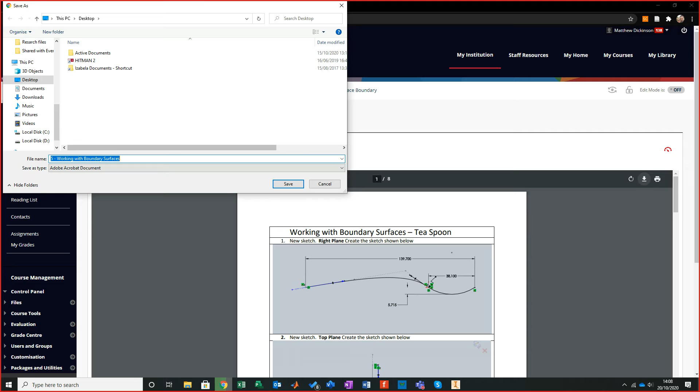First things first, I'm just going to download... apologies, goodness, so I'm just going to download Surface Boundary, and I'm going to download these to my desktop. I hate looking at these on here, even though they say it's a perfect viewer. I hate looking at them on there. So I'm just going to close that. So that's where they've come from.

Let me just come down to here. I'm going to right click and open with... I'll just open it with Google.

Right, so splines. Splines are amazing, they are your best friend, but they can also be your worst enemy. What you'll realise here is all my lines are blue, apart from my black line here, but all the other lines are blue, and this is purely because there is very little that's really constrained at this point. This is very, very movable, very changeable and interchangeable, and it makes life good in one way, tricky in another.

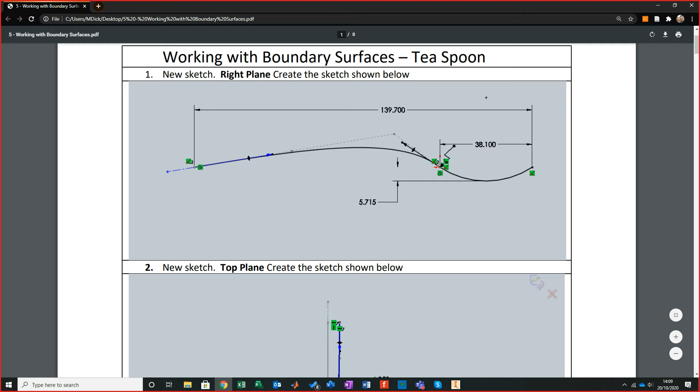It makes life okay in some cases, but before I start flogging this to death, let's start producing these: the spline and the controllers. Let me just open up my Inventor. I've even got my demo one up as well, just in case something goes wrong for me.

What I'm going to do is come from my YZ plane. What I'm looking to do is make the first sketch. This is where it becomes really tricky, really tricky.

So, to show you what we're actually looking at, this is what's called a two-point spline, so it's got a start and an end. Now the spline was originally devised by a French mathematician called - if anybody's French and I pronounce this wrong, apologies - Bézier. What he did is he came up with using linear lines to actually present a bend. Originally he was looking at bending aluminium, deforming aluminium, and trying to calculate how to do that. He came up with some phenomenal calculations, but once we got into the new age of the computer, they were able to take that theory and apply it to our everyday CAD system, hence the spline.

These markers here show that original thing that he was doing. It shows that constraint, and it shows in essence exactly what he was doing. So what we're going to do is first create the 3-point curve, this 3-point arc here, and we're going to use Inventor to generate it.

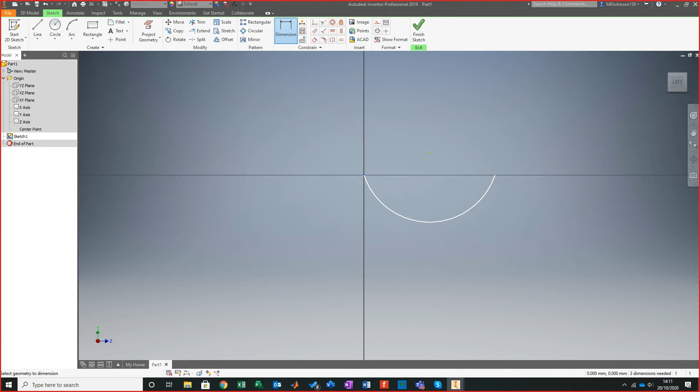What I'm going to do is put on my distance between there and there. This distance now is 38.1, and now this... oh, look at that, that's a swine. So let me go horizontal.

Vertical, because it's going X and Y - it's because I'm looking at it from a different perspective, that's why it was doing that. So I've just locked them in with a vertical.

And what I should be able to do is make it bigger, make it smaller, as ever, just shrink to whatever. Now what I actually want to do is recreate my arc here, my maximum measurement here.

Now, sadly, Inventor does not contain the ability to measure outside of a minimum for an arc. If anybody does know that, please let me know. I've been racking my brain to regenerate that, and it's bugged the living god out of me.

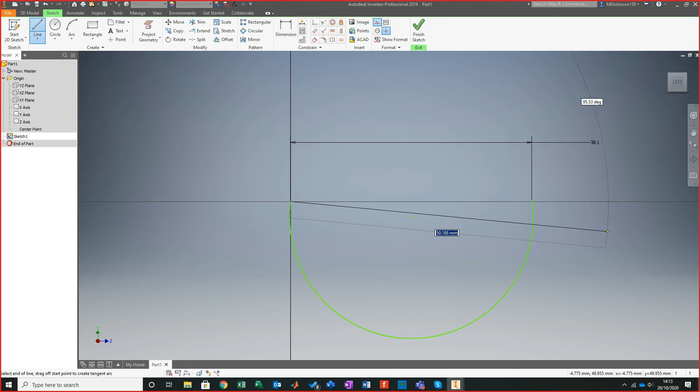So what I'm going to do is go about this the conventional way, which is apply a construction line and make it normal to here, and then make that totally vertical in relation to the arc. Then that'll allow me to create this.

5.715 millimeters. What I'm essentially doing is creating the cup of the spoon, or however you want to class it. So I'll go 5.715, and that now gives me that particular shape.

And just to show you what we've done, we've created this shape. Now what I want to do is take the next step. This next step, no matter which CAD system you use, creating this changeable spline is a bit problematic. Well, it's not problematic, it's temperamental in some ways. It's delicate, let's say.

Now I can either use an interpolation or control vertexes. The way I've presented it on the notes is an interpolation method. So I'll go interpolation and unclick my construction, come from the edge of the spoon, and give myself a distance. In fact, to be sure, I'm going to put it down there for the minute and click OK.

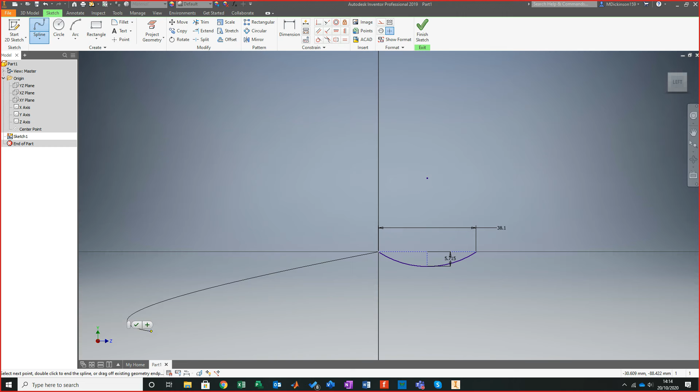Now, the reason I've done that is there's a few things we can do, but first things first, I just want to examine this. Now, if you click onto it, and then click there, it acts like a line.

And one function, which I must admit, as a student, I wasn't aware of, I was never clear about, is we've got these weird-looking lines here. These lines are called the controls.

Now, if I left click once onto the control, then right click, on this list you'll see you've got activate handle. So if I activate the handle, what you'll then see is that it becomes tangent. You go, okay, that doesn't really tell me much, but let's just get the other side activated as well, because we're going to manipulate these.

So come over to that handle as well, right click on it, activate handle. And all you've done now is made it so we can manipulate a single line. So we can now move these handles and it will move. Now these two marker handles will literally work like a normal handle.

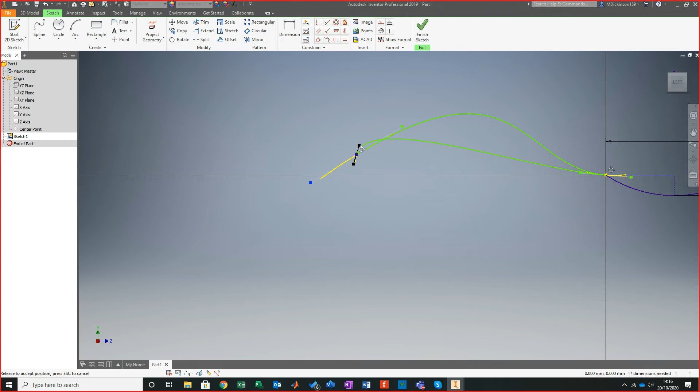But these handles now will allow me to export the line. It'll allow me to literally construct or contract the line, or allow me to manipulate its flow. These tools here are amazing for what we want to do. They're bang on, they're really good.

But then if I want to move this completely, I've got my mid marker here. Now my mid marker allows me to move its orientation. Often getting back onto it can be a bit problematic, but luckily it's playing ball today.

So, first things first, let's just come back and examine exactly what we're looking at. See here, we've got the 3-point arc, and then we've got a tangent where it flows upwards onto the actual edge. So let's do that. Let's take a look at this tangent and get that into play.

Now this is dead easy. This is really easily done. It's one of those where you go, wow, that was ace.

So, look at these constraints. We've got all the selections that we need. Now, under tangent, it's literally saying, as you'd imagine, as you've had to listen to for years on end, give me a tangent marker to actually operate to. So I select my spline, I select my 3-point arc.

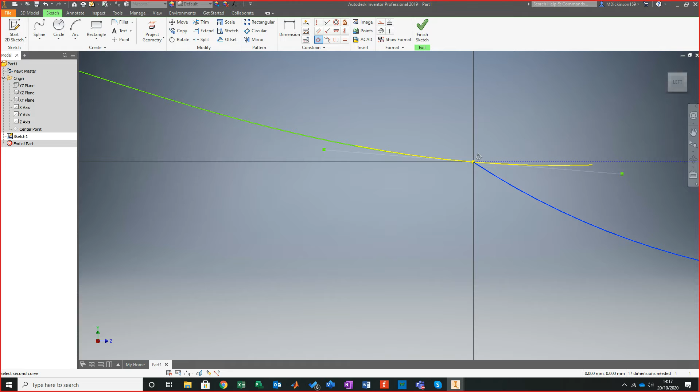Okay, let's just put it on there. So I've actually done it on my control. Now the reason I've done it on the handle is I quite like this. I can still use that, but what you'll notice now is we've no freedom around there anymore. We're only operating relative to the tangent.

So what I'm going to do is just bring this around and get it lined up. We are going to do more with this as of yet. Now the distance between these two, I'm going to go dimension, come from my midpoint here, and then right to the end of the tip of the spoon. We're going to, yes, oh, what's it restricted by?

Oh, it's not happy with it. I tell you, I was going so well. Let me try that again. So let's go from the tip of the spoon to here. Can't think what that would be restricted by.

Oh, that's gone so well, so well. So I'm just going to deactivate my handle for the minute, and I want to see if that's going to allow me to do the distance across that way. There you go, so I deactivated the handle. I suppose what it was referring to is it wasn't happy with restricting that handle.

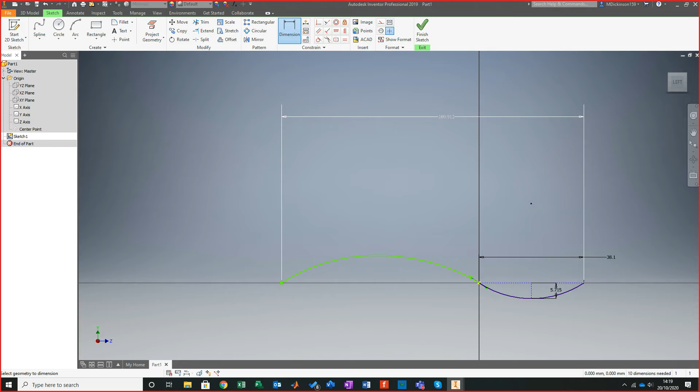This dimension now goes 139.7 millimeters. Oh wow, that's actually come out pretty nicely as that. I genuinely didn't think it was going to come out looking so nice there, but it really did.

What I'll do is just click back onto, let me come off here. Escape on there, come back onto here. I'm going to reactivate my handle. So activate the handle, and we've got a tangent relationship coming from there, which is nice. And if I click onto, come on.

I'm going to just see if I can give a little bit more body to it. You'll notice I've just slipped off, which is not good. So what I want to do is create a vertical between, whoops, not that. I'm going to come back onto here.

I'm going to now deactivate the handle again, and I just want to create a vertical between it. If you remember, this is because of the component we're operating in. So if I then click on my midpoint here, and then I choose my vertical here, it then just snaps it up. Oops. And now we've got our handle shape that we wanted.

Now again, if I'm not happy with it, I can right click and activate the handle, and then I can simply move things up or move it more aggressively like this, or back down, or something like that. Quite a depth to the spoon is that. I might just move it back in a little bit.

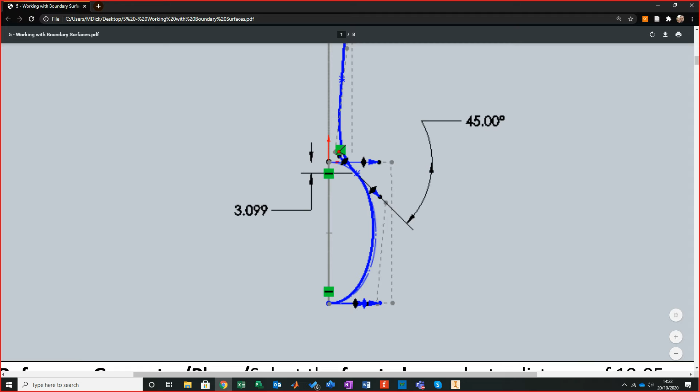This leads from each point on the original curve that we put on there. This then connects all the way around and actually gives us a key construction. Now what we're going to do is bring in a 4-point spline. Now if you look, again, this is all freedom, it has full freedom for motion. What this line, well this lead, starts perpendicular, well vertical actually, and then follows down. This point moves, and it's still got that freedom to move.

So there's still very much that loose end there, if you will. But the reason I've done this is we are moving to that idea of what do you do when you've got no dimensions, apart from get really annoyed and throw things at a screen and shout, why did you not do that? Because that's what I do. When that comes down and then it interconnects here and then here. So that's what we're going to do now.

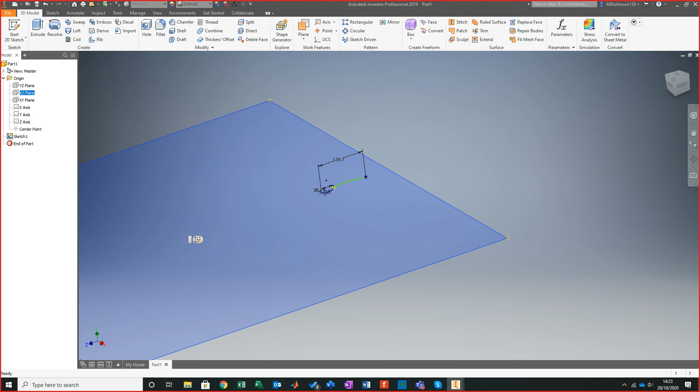So I'm going to come back out, and then from this point I just now need the plane which operates, in this case it would be the top plane, but in our case it's the XZ plane. So I'm going to sketch, I'm going to zoom in, and first I'm going to set up my construction. So I'm going to do my interpolation spline.

To make life easier I'm just going to go to my origin, which is here, come back down. I'm going to put it there, only because if you looked then it wasn't locating to my edge. Now I suspect it's not locating because I need to project that geometry. So I'm just going to track along to the end point, and then click these two together by going constraint, this point to that point.

I know it's meant to be construction, and I know it's meant to

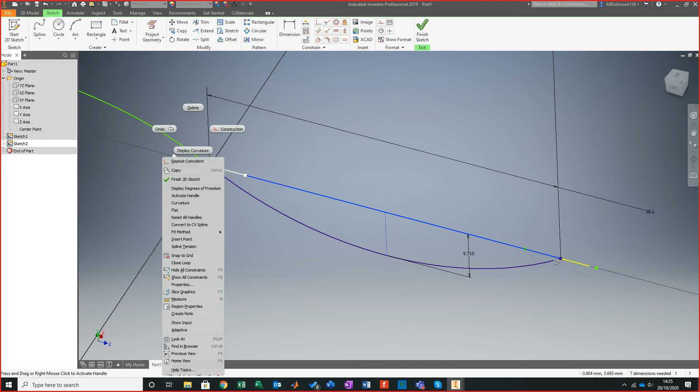Be bent. In this case, all I'm doing is just setting things up first. Now what I want to do is spin back round, and you'll see if I left click on that line again, it goes blue because it's locating these handles. So I'm going to right click again, activate handle, and do the same thing on the other side, right click, activate handle, then go to the top, and now if I left click on the handle and bring it out.

I'm just going to left click on that handle and bring it out. Right, so we're looking different. What I really need these to be now is perpendicular to here.

Now I can see it's instantly going to start complaining. It's what this system does, it's good at complaining. So I'm going to go project geometry, and make whatever I project a construction. I'm going to select off here.

Now this is very, very useful. We've now got our spline onto here, and we've now got this as a reference point. So what I'll do is go to the top, come back in, and if I...

Now what I actually want to do is make this handle perpendicular to our new construction line. So I'm going to go perpendicular constraint, my handle to my construction. Again, repeat the same thing on the other side, my handle to my construction, and now we're looking pretty slick, if I'm honest.

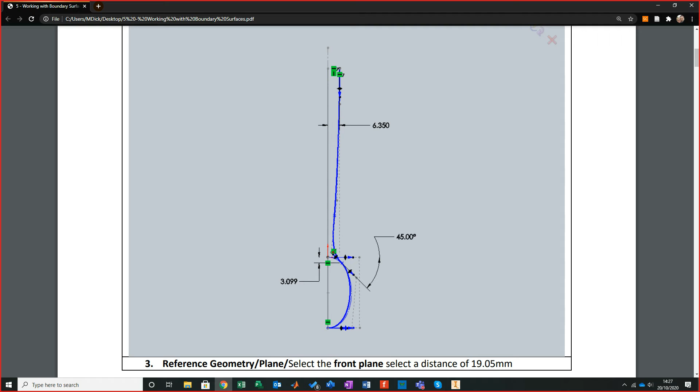What I'm going to do though, interestingly, is I'm probably going to leave on my handles. Let me think. Yes, I will leave my handles on. No, in fact, I won't. I think I'm going to deactivate my handles for the minute, just because I'm happy with where they're sitting. But if I need to change things, I can obviously come back, that's an option.

Right, so let's come back in. And now what I want is 4 points. So I want one here. I always start here, it's a nice point to start. Now don't forget, this is interpolation. And also, I forgot to turn off my construction. Silly sod, already almost making mistakes.

So I'm going to click onto here. 1, 2, oh it's 3, sorry. So I've got my starting point 3 and then 1 here, roughly there, for 4. And click OK. Doesn't look nice yet. I say yet because I know it doesn't look nice.

So what I'm going to do is activate my handle. And what I want to do is now try and make this handle collinear with this handle. Now I can't remember whether I need to turn that handle back on, but we'll see. So I've got my handle activated here. I'm going to go up the chain and keep doing this, but this is my key starting point to copy this flow. Right, so I'm going to go collinear.

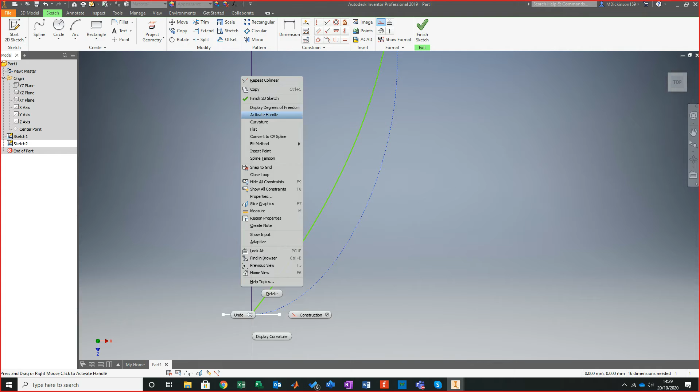Now look, I forgot to make this vertical. Let me just check that I am looking at a vertical in this case. Ah, no, we're going horizontal in this one because it's referring to this datum, which is a weird experience I appreciate.

Right, that's better. So now if I move, I can only move in that component set, which is ideal. Look at that, that's done it as well. It's okay, I'll change that in a minute.

So now that allows me to control my line a little bit more to try and get it roughly where I want it to be. This has just gone a little bit belly up, so I'm going to activate that handle again. And I want this to be horizontal on that line. Like that, look at that.

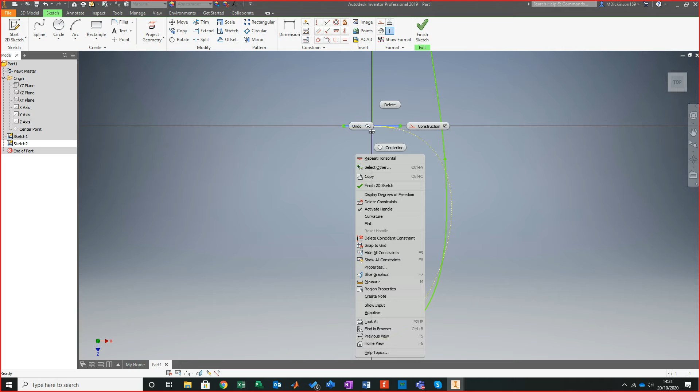What a pain. We'll bring that back in just to give me that egg shape. And now I'm probably going to deactivate this handle.

So now we've got this point and this point. Now to show you what I'm doing, if I zoom in you can see how this has been constructed. We have that construction here. We've got that perpendicular based on that line, and we got that perpendicular based on that line.

And what we want to do is try and lock these into position. So I actually want to make this point coincident to this construction, like that. Now there is a reason for it.

The distance from the datum on that, on dimension, I'm going to go from this point to this point, and this now is brought back to 3.099. Brings that back, and we're looking a little bit more healthier-ish.

So I'm going to click out of there. And see here, we've got a handle. So I'm going to right click, activate my handle, and try to just give me a rough shape which allows me to match against it.

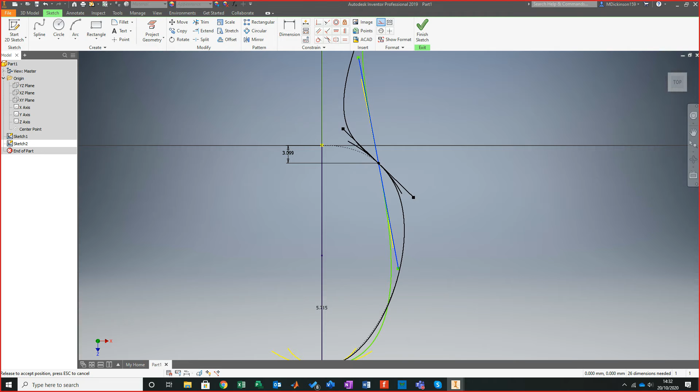And yeah, okay, I mean, perhaps that spoon's a little bit too...

Just to try to stay relative to the notes, you see here we've got the small gap. So that's what I'm essentially trying to do here, just to give it that freedom around where that curve goes.

Then what I'll do is, again, I'm just going to switch that handle off. And now it's starting to look a little bit more like I was after. Happy days. So I'm going to bring that down.

Oh, look at that. That's actually played with that like I didn't want it, to be honest. We're going to fix that in just a second.

Right, so handles wise here, I'm going to activate this handle here because this handle is well wrong. Bring that round. Okay.

Now it's probably complaining because I've restricted so many different things. Could be something. Yes, okay. It's not happy with me putting this dimension on there.

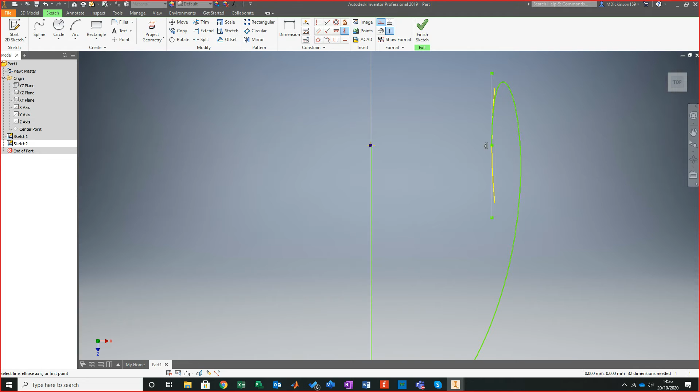Okay, let me see if I can make this vertical. Whoops, not that one. So what I'm going to do is try and make this lower one vertical and see if it'll allow it to spin round. That's not worked well for me there at all. It's going so well, so well. There we go.

And now what I'm going to try and do is make this one vertical. Now the reason I'm doing that is we have horizontal between these two and we have a vertical, and then this handle is restrained to 6.35 millimeters.

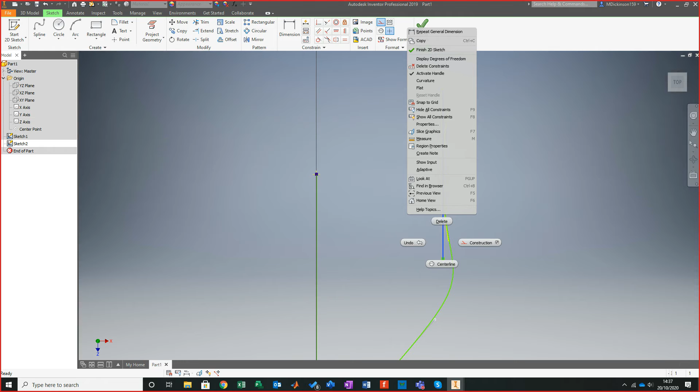So I come back in again using that point, which I might as well, then coming from here, and I can go, except yeah, it's not happy with that. This is just because I've left the bloody handle activated. So I'm going to deactivate the handle and then come back and then click onto here, and this now becomes 6.350. Slamming that into place like that.

And then the handle, being a massive pain in the backside, has now lost that constraint, just that beautiful constraint I've just added, and it's gone.

There we go. Right, let's try this again. So I'm going to go vertical. Right.

Now I'm not going to do anything with that now, because it might break and annoy me even more. So I've just clicked escape, and what I'm going to do now is try and bring this into play. This one now is, I may switch that handle on.

Now this is the upsetting bit. This has now been pushed around and it looks like it's just been abused. So what we want to do now is, I'm going to activate, oh, the handle's already activated. Oh, you swine.

So what I'm going to do is dimension this, there. This now is restricted to not that, 3.099.

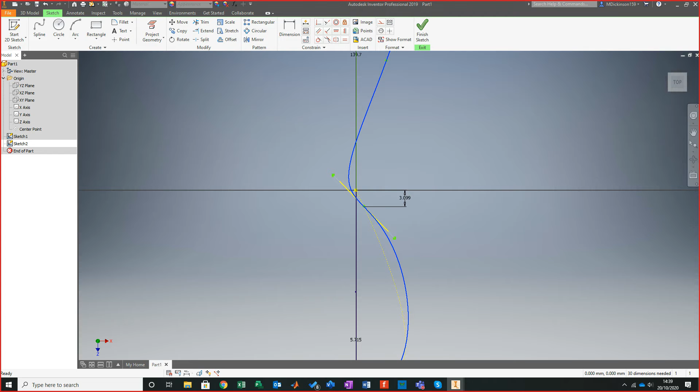Back in a little bit there.

Right, so what I'm going to do is just come back to here, because lost that again, and it's probably because I'm deactivating and switching the handle on every 2 minutes.

So now what I need to do is just make that perpendicular once again, which is annoying really, but...

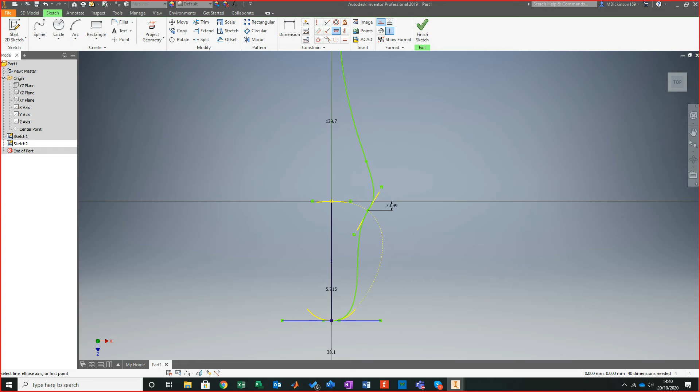On this handle I should be able to start pushing this back round. A little bit more like that.

Back in, come on you swine. It's just to push that round. It's still not happy with me making these changes.

Unless it's because I'm changing too much down here. No. Take that dimension off. Not happy with that dimension for some reason.

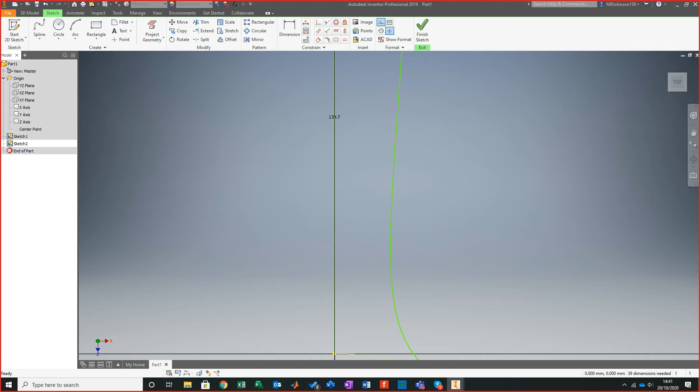Okay, so finally, I'm just going to use this handle to just try and smooth out that. So here, if I can just spin you a little bit.

I mean, arguably, we could go for a greater body on that side, or less of a body. It just comes down to really how we're going to progress that body. Right.

So now we're on this position, we've now got 2 particular drawings, and the last thing that we want to do is put on a plane on here, because what we're going to do is now create the profile of the spoon all the way up. Now the beauty of this is we can create an entire flow from the tip of the spoon right to the top, and then look to start trimming things out. Apologies, one second.

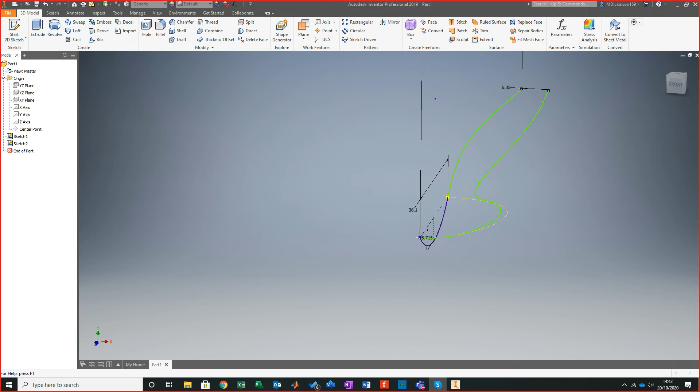Right, so we've now got that profile, and arguably, I mean, you could sit there and go, well, is that body too wide? But what we do is first get this into position, get this into a sizing, and you'll see that on these notes in particular, I'd chosen some dimensions already, so at least then we knew what was going to be happening and what we could essentially do.

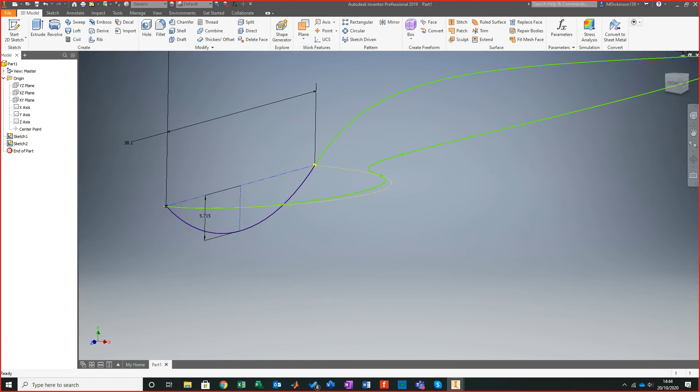What you should really realise is it's really in the sketch. It's really in that process of the sketch and getting the sketch just right, and that's what the most difficult thing is within this. So what I'm going to do is set a spline.

And I'm going to set a plane. Now this plane is based from the offset of the centre, so I'll go offset from plane. And let me just see which plane we're looking at. So we're looking at the XY plane.

Just double check, we are looking at the XY plane. And what I want to do is move 19.05 millimeters, or 38.1 over 2. What you see is it sits bang in the middle of our arc.

I'm going to need this geometry to give me a point in space to operate with. So first things first, let's go on this plane, let's set up a sketch. So I set up that sketch. I don't need this anymore, so I'm going to hide that.

And I do this because otherwise it will leave me really confused and a bit frustrated with what exactly I'm meant to be doing. I'm going to add a circle.

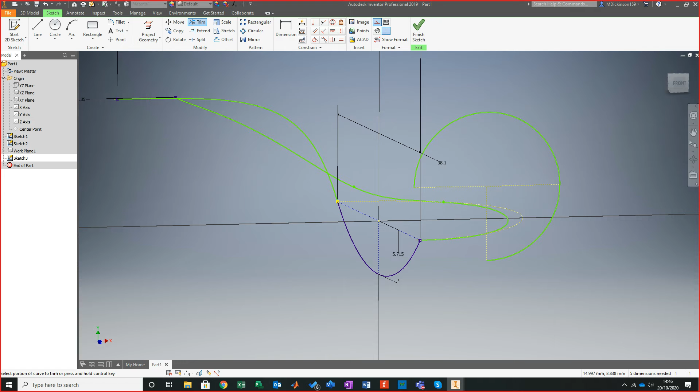Then what I'll do is I'm going to use a construction line. I'm going to quarterize this circle. So I'm going to go there to there, and centre to here to here. Then what I'm going to do is I'm going to trim here and here. This now gives me my arc.

So what I'll do is go collinear. Oh, hang on a second. Let me just put on a dimension. Just realised I've not even added the dimension. So my radius of this now should be 15.842 millimeters. Very specific. 15.842 millimeters, and then we're on to there.

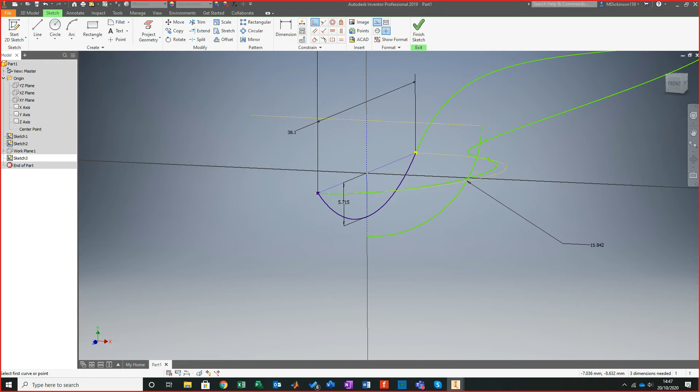Now, if I go collinear, adding the collinear relationship between - oh look at that, I forgot to add that in. So I'm going to project my geometry from there, go collinear relationship from there to there, and now what I should be able to do is move freely up and down as you should be able to do.

And then I'm going to make a coincident between this point and this point. And this now gives me my spoon profile that I'll be moving towards.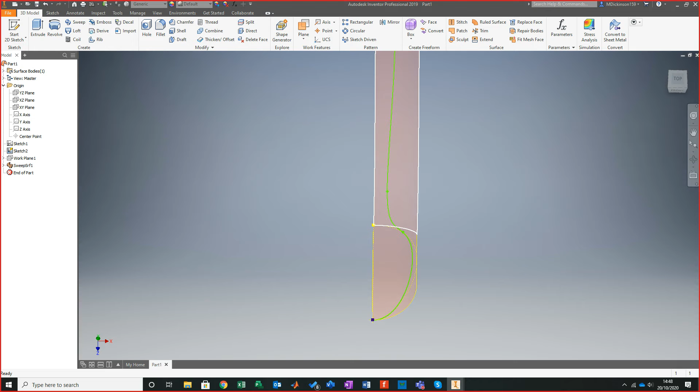Now if you look from above, we've now got the ultimate trimming tool. We can run a sketch to here and then trim outwards. So that's what I'm going to do. I'm going to use what I've already done, my base master sketch. I'm going to use that for what I've already done, and I'm just going to add a little bit to it.

So I've gone onto a sketch coming from the XZ plane, and now what I'll do is go project geometry from this sketch, and then all I'm going to do is add a profile from here to just inline here, and just that. That's all I'm going to do.

And now all I want to do now is start to trim things away. So click OK, and I'm going to go trim. In my trimming tool it says select your cutting tool. So I'm going to select this as my cutting.

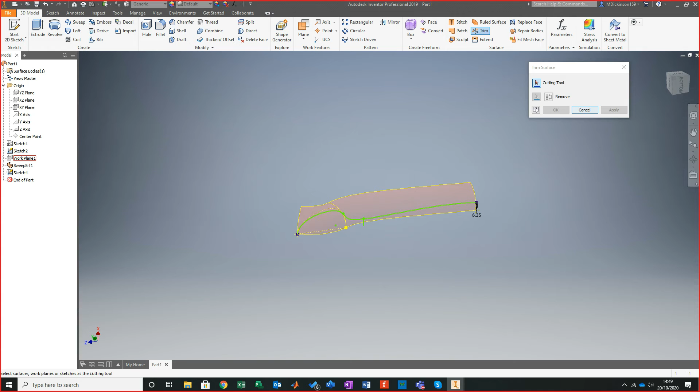In fact, let me just see if I can. I need to hide that sketch because it's going to get very confusing otherwise. So I'll just hide that sketch, and I'm going to use this last sketch as a cutting tool mechanism. So I'm going to go trim. I'm going to go this as my cutting tool, and let's see what it will allow me to cut.

Now that's not brought in everything like I hoped it would. So what I will do is I'm going to go back onto here, onto this sketch, and I'm just going to trim this back end away so I can cut just a spoon off. So I'm going to edit that sketch.

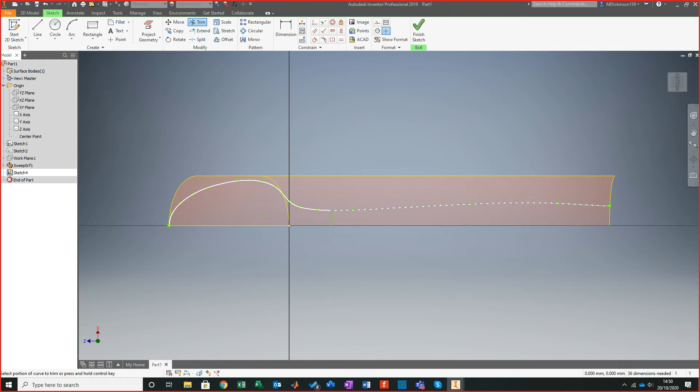And I want this bit trimming away. So can I trim? Can't yet because it's still constrained. So what I'll do with that is - and all I've done is deleted my constraints off, and now I'm simply going to trim away the bits that I don't want. In this case it's just that, and then OK.

Hopefully that should allow me to project through, but let's see. So again, I'll go trim, choose this as my cutting tool, and what do I want to remove? I want to remove that, and there is my first

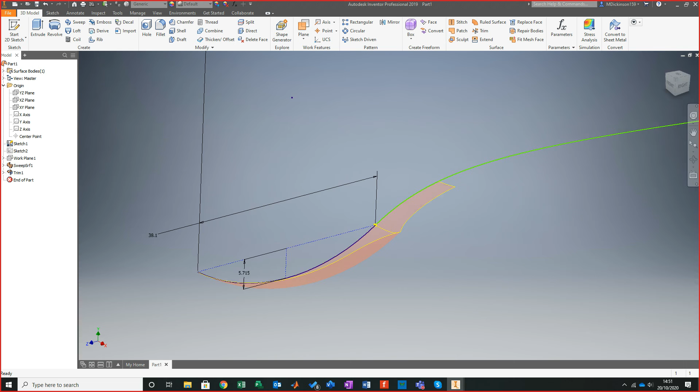profile of my spoon. Now what I want to do is bring these sketches back in, because these are now going to take me to the next phase that I need to do. So I'm going to make this visible. And we see what we've got here. Got the profile across.

Oops, oh, I didn't mean to do that. I'm going to make this visible.

Now, what I've done with this is I've made this a flat end spoon. I can, remember at the beginning where we had this spline, push it upwards if I want to give it more of a rise on the back, to put more of a profile into there, or not. In fact, we'll do that in just a second, but this is going to allow us to get that profile in position. So the next thing I now really want is a plane to sit interface on these two. Now because they're horizontal, it should allow me to do that, no problem.

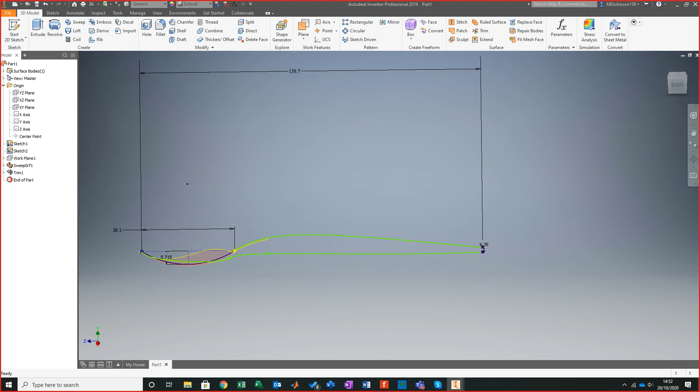So what I think I'll do first is I want a profile to flow nicely from that edge. Every spoon has that continuous flow to the end and you go, oh yeah, it's a nice spoon. So what I'll do is go plane, normal to curve, and I'm going to select on here and on that point there, like that. This now gives me just a nice simple plane to operate with.

If you remember, that function is one that we've used quite a few times on advanced lofting and things like that. Because it's linearized between the two, I'm going to first go to my project geometry. I want that point and I want that point, and I'm simply going to draw a line at this point. At this point, I'm going to draw a line, and it just creates a profile.

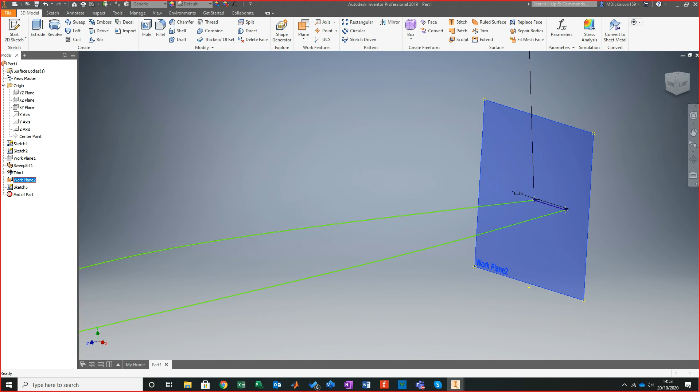That's all it's done. So I'm going to hide that first, and let's try and start building this in. So let's do a loft. Choose that. Choose another edge.

And what I want to do is, this is where it becomes a real pain in the backside. See, what I did then is I've right clicked. I'm going to see if I can just select a section onto there. Oh no, I don't want that. Oh, that was my mistake. That was my mistake. Try that again.

As I said, I've got my demonstration one as well, ready and willing, because it was frustrating me earlier. There's a particular function which I could not get the blasted thing to move like I wanted it to.

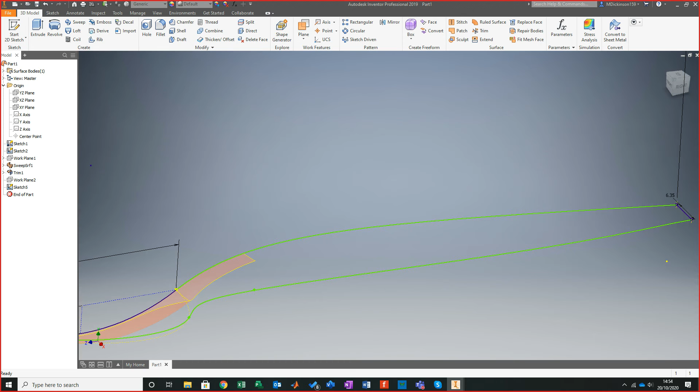Okay, so let's try that again. Now, I'm going to, so let's try it again. Now this can come down to, no, that's okay. So I'm going to do loft, this profile, to this, to this profile, and we want to add

I had to click it a couple of times to get it to come in. It's a real tricky one because you select it and there's never any guidance. I'll show you what I was doing. There's never any guidance on this. There is a lot of intelligent functions incorporated into this system, and you go, it's great being intelligent, but if you can't tell me what you're doing, you're no good.

And that's what can come across with this. So if I click on there and you go, look, and you click it, and you go, well, what? Click it again. What you do is you center out your profile that you want to go to, then you click it again to see the area that you want to use. Does anything tell you that? No, it doesn't. It just says, should have known that.

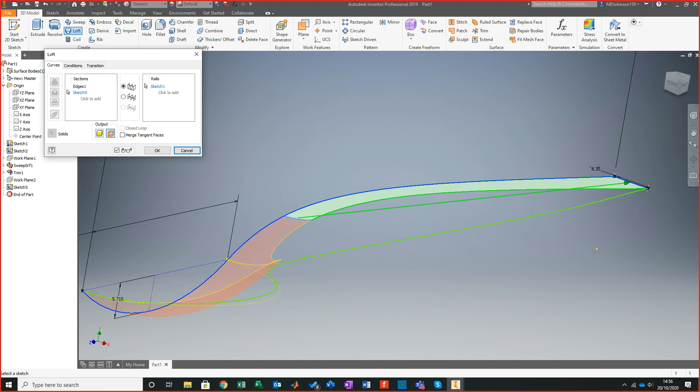Click OK. And now if I hide these two, as we've done before, I need to stitch these together, because it's still counting these as separate faces. So what I want to do is simply stitch them. I'm going to stitch, maintain as a surface, and click apply. Now we've got one piece that we can operate on.

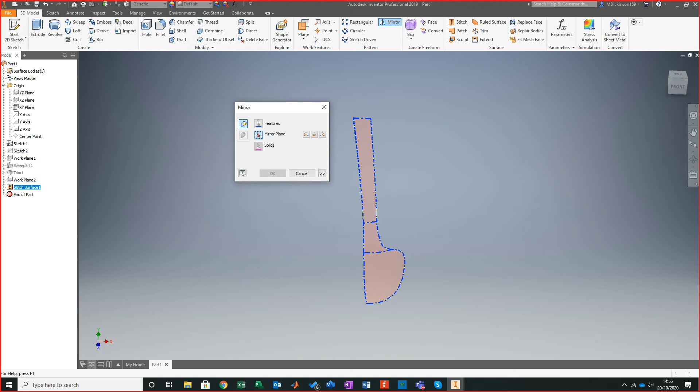I'm going to simply mirror that feature, and use my mirror plane. You can see there I can either go YZ, and in this case it is the YZ, so if I click YZ, it's a very quick way of doing it. That's a function that I think is great, really good.

I'm going to do an identical adjustment, we'll just go identical. My spoon handle's a little bit wide there, I would say. So if I go stitch, stitch, stitch, click apply, maintain it as a surface. Now we've got, you'll notice the entities have been sealed as one piece, just because it's curved.

Now, if I simply go to my thicken, where is my thicken? Thicken. I'll select the whole thing, and it's a 1mm thickness. So if I just click apply... or not, I'm going to go inwards then, which is much of a cheat.

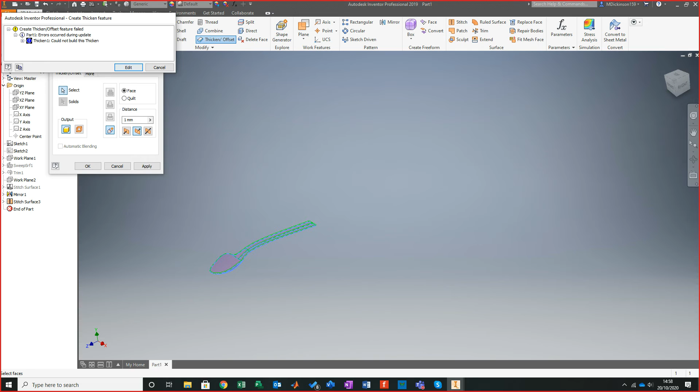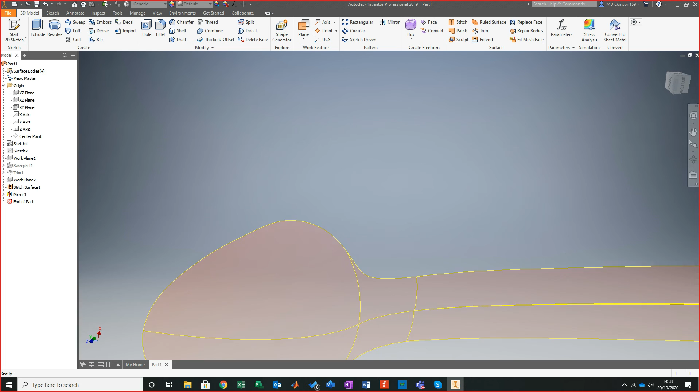Story of my life with this, it really is. Let me just have a quick look where it's complaining. The swine, I swear to God. Okay, let me just remove that stitch. Just need to look to see if I've caused any major issues there.

I don't think I have, which, well, I obviously have, or else it would thicken straight away. Let's just try that. So I'll just thicken this side and just see, just because I'm curious as to if there's something in particular that's gone wrong with that.

Ah, now I think, oh, look at that, I see it. Oh, you swine, that's what it is. See how we've got an overlap? They're actually sitting just on top of each other. Ah, I'd have found that, because that would have really annoyed me. This is coming because it makes me wonder if that back end is actually just missing. Oh, that's a swine, is that?

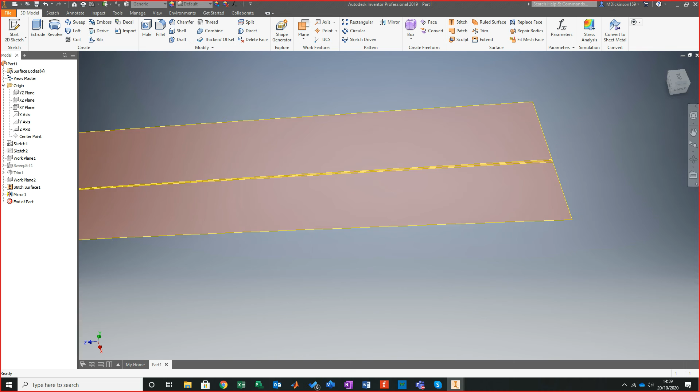Look at that. So I'm just going to delete my mirror. It's the technique I used. Oh, look at that, there's a really thin edge. Let me just see where that runs to, and then we're going to send that the way of the dodo. Yep, okay, so what's happened is when I've probably trimmed my arc, I didn't trim it properly or closely enough to that particular edge, and that's caught me out.

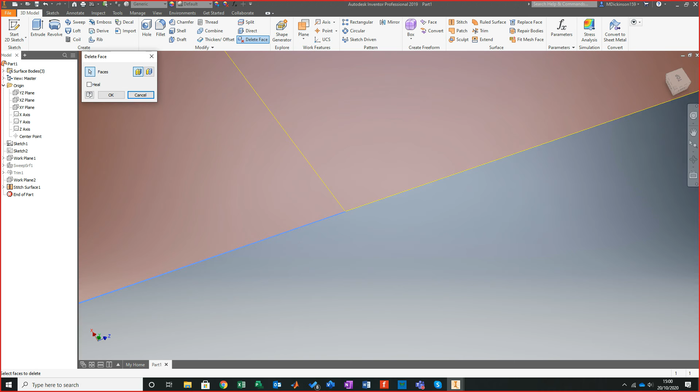So all I'm going to do is just delete the face, because I know that is obsolete. See how far that face goes. Let me just make sure it doesn't go any further. I don't think it does, because it's come from that floor to the back, so just click OK. And now I've got rid of that face. It should now give me what I'm after.

Okay, so let me go trim. Just did a quick trim just to get rid of it. Now, now it better thicken. Oh, I need stitching. I'm going to do a stitch, this and this. Maintain as a surface, apply, and done.

So then I'm going to do a thicken of that, and do internal. Oh, either way, it doesn't really matter. It should now do it. Thank you. So...

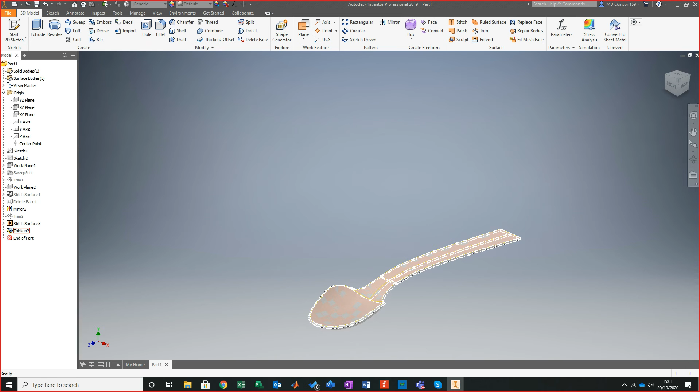I'll just hide my surface for the moment. Now you'll notice what this system does is it continuously generates ghost parts. These ghost parts are referable back. You can extract each one of these ghost parts, and it allows you to do different things. It's pretty cool for what it can actually do. So my surface body here, for example, if I go back, you'll see all the ghost parts that exist.

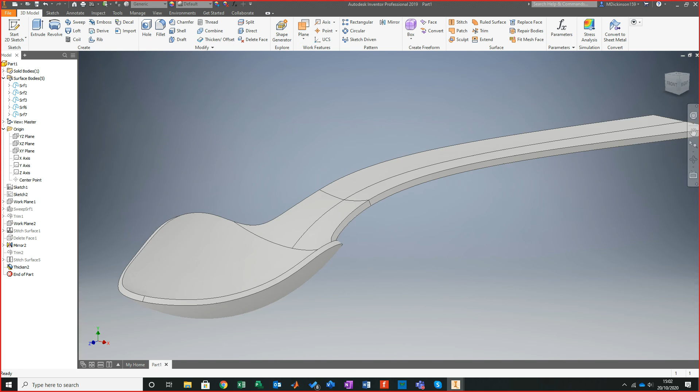But with Inventor, when the surface body parts are turned off, they're actually no longer visible completely, and you can just move continuously onwards from then on as a surface, as a solid. So you have that ability to jump backwards and forwards. They do remain totally related, but it just allows it to almost save a temporary behaviour, if you will.

For the view, if I just turn that off, just to take a look at it as a shade, yeah, that's not giving me too much, but it just gives you an idea. If I go to my Inventor view, let me just see if we can find something polished. Polished chrome, yeah, it's good.

Granted, this single side on this handle here, what I could do is go back to my original sketch and edit. On this original sketch, you know how we made this vertical in relation to everything else, so it was all in line. If I move this upwards any, I can actually give it more of a curve, an arc if you will, to where it's going to flow between. And granted, it can be even more sexy - it's just about creating those distances, creating that profile you're looking for.

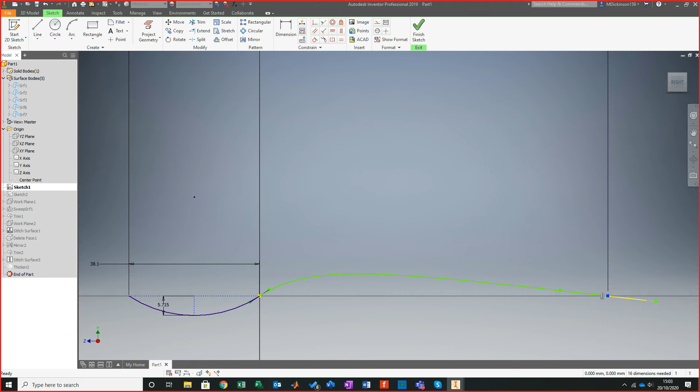Right, so let me just turn that to something a bit more with lines. So that's using splines, and what splines can do - splines in this case can be really useful. My curve here, by the way, has appeared because of the way it's been trimmed and the way I've done the two sketches over it.

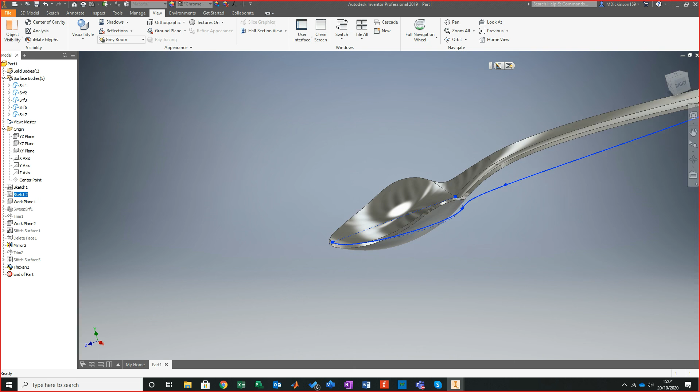If I want to fine tune these even more, if you look here, you can see how that profile comes up, and that profile was pretty good - well, at least I liked it. And then if you look on the lower sketch here, this has come because of that distance there.

So if I trim that in slightly, this will bring this wall down, because the trim state will become bigger. If I wanted, I could insist on more of a flow between there, but that is in essence how to fix that straight edge, to make it even more circular. I mean, at the minute it looks more like an ice cream spoon, but that is as I said, that is your profiles.

We could easily now take that and simulate it - simulate eating ice cream off it, or using this to change a bike tire, which is a common example. So that's gone a lot more smooth than what it did yesterday, to be honest.

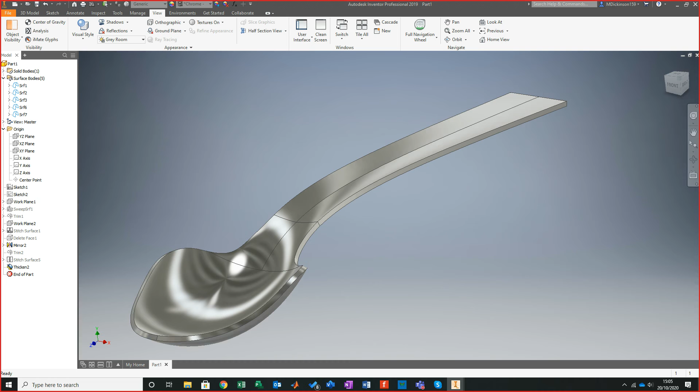As before I crack on with other things, is there any burning questions about what we've done there? Has anybody had an issue with trying to get their splines working? Again, I appreciate that some of you will have done splines before. Splines are incredibly useful for generating really complex curves, but it comes really down to just experience and getting used to using the handles and using the profiles for them handles.

One thing I did realise on this sketch, I forgot to put in my 45-degree angle from datum to here. I can easily add that, but that will bring this angle further down. To show you where I'm at on the notes, I just forgot to add that 45-degree from the handle there, and I could do with adding that in.

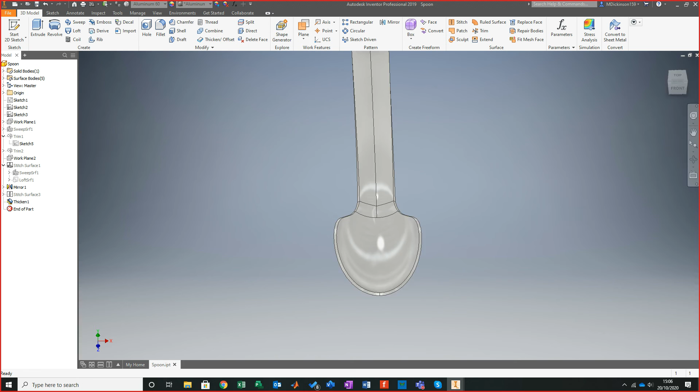But to show you the difference between the two, I'll just show you the one that I'd made earlier. So look at the difference between the two - it's not much at all, but that is restricted to that 45-degree angle. It just depends.

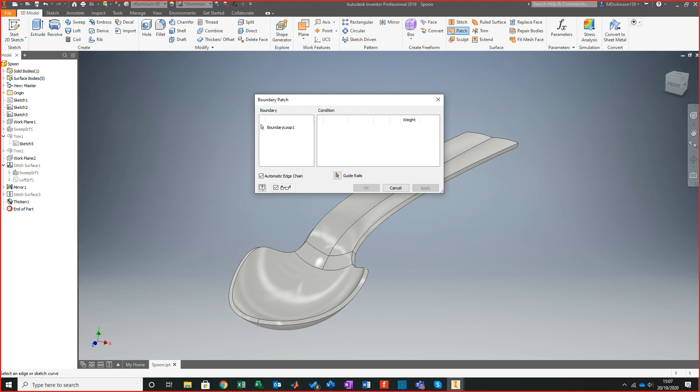So as I said, that is using splines and the use of splines. You'll notice in the notes as well, I talked about in SolidWorks, there's a tool called boundary tools. Now in Inventor, this tool does not exist - it's a default tool which is quite common, and a lot of people do use the boundary tool. In here you do have some boundary methods, and one that we've used before, which is the boundary patch. Now the boundary patch just works on the idea of constraint areas, and then it will try to patch around specific targets. But in this case, the best way to achieve this was loft and sweep, and that's what I found. If you've found a difference, you may have found a little change in that, but it just depends what your experience is and what you've done with it so far.

Right, as I said, I want to save that, because there is another set of notes that I wanted to take you through and take you through the use of them. And then, yeah, I'm going to leave this session open for questions, or if anybody's got any issues, or anybody wants any help with anything, I'm going to leave this session open for that.

So, let me come to my note sets. This was using that. As ever, I will upload my model once I'm done, so you can take a look at what my solution was and how I got there.

So I'm going to go to UCLan and first download the second set of notes. It's not a big one, not a difficult one, but this is just an insight for any of you who are unsure about where to start when given something. One of the most common questions I've been asked in the past was about my Iron Man helmets, where they came from, where that profile came from. I'm going to show you now how I've done it in the past.

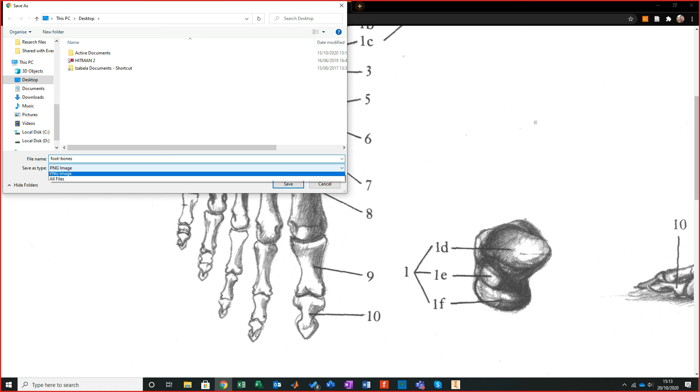Can I actually download that image? Right, if I right click on the image, I'll go save image as. Can I bring it as a JPEG? I cannot bring it as a JPEG. Scheiße. So we go right click, save image as - that is not allowing me to download the thing.

What I need this to be is not PNG format, I need it to be JPEG. Let's have a look at what this is offering. Let's go shoulder and collarbone - is this going to allow me?

Normally you don't hit so many issues like that. Yeah, that's not being very useful at all. Let me just try another one. That's awkward.

Let's just try this, it's all from the same supplier I think. Let me go motorcycle, see if that'll bring it down. Not enough. That database was useless, so I'm just going to go humans. I'm just randomly going through everything now.

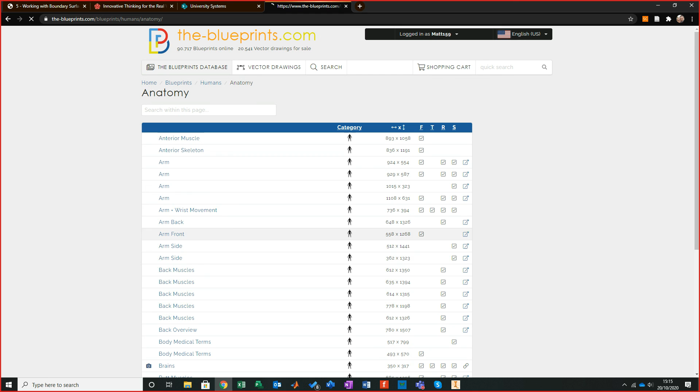So if I go anatomy, and then let's go anatomy skeleton. Oh, what I'm essentially after is yeah, something like that actually, something like. I'm after just a JPEG, that's all I'm actually after. So I've got back muscles.

This is really awkward, I was literally on this just the other day. Okay, let's do something nerdy. Let's just pick one, so let's go like that, and have a look. Is that going to give me something useful? Oh, finally, that's something useful.

It's irrelevant what I'm doing, but if I right click and save image as, you'll see it's come down as a GIF. If I go onto my desktop I'm just going to save that image.

Now what I want to do is, with this imagery, I can split this into pieces. Personally, for years I've used Visio. If you've never used it before, I would 100% recommend this. It creates diagrams like you would not believe. The diagrams are so sexy that when you apply them into your work, you look and go, wow, I can't believe I made that. I'd 100% recommend this. If anybody's seen any of my presentations where I've got drawings on the presentation, this is how I do it.

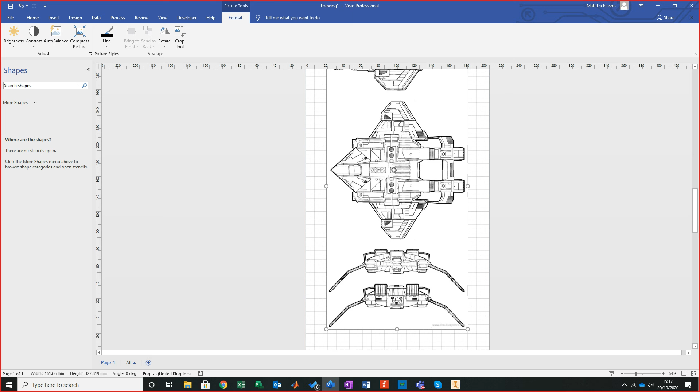I'm going to go insert, add a picture, go to desktop, go to my folder, and click open, and that's what gets brought in. There are 4 particular drawings to really display what it can do, so I'm going to copy, paste, 2, 3, 4, bring all 4 in.

All I'm going to do is trim it down. First things first, let's do a crop, and I want the top image. Then, well really I took the side image, so that's the top image. And then what I'm going to do is go front.

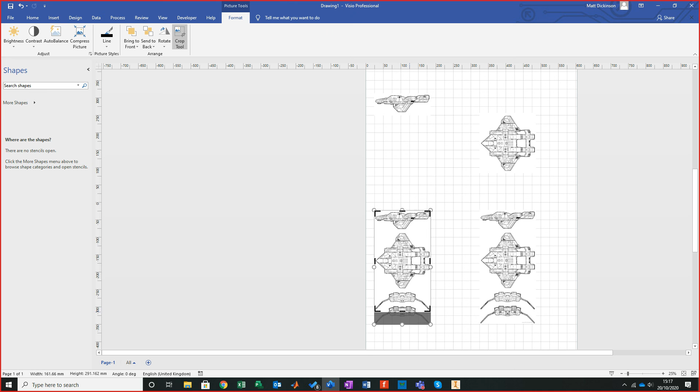Now that's frustrating, this happens a lot. But you've got to remember these are being used as reference, that's all. They're not anything where it has to be completely bulletproof. I've just chosen something incredibly nerdy, but the truth is you can get drawings of particular aircraft, particular cars, particular anatomic features, which you could see there because I couldn't download the right imagery.

So what I'll do is save my top and my side profile, which is one of the biggies. I've clicked on the side profile and I'm just going to go save as, browse to your design folder, and I'm going to save it as a JPEG and call this side.

Click save, it asks me for the quality. I'm going to try and get the highest quality I can. Even though it's black and white, I want the highest quality, because it is quite a well-defined drawing, really, to be fair.

And I'm going to do the same on my top one as well, so save as, onto desktop, drop that down, and call that top. Click OK, and then OK.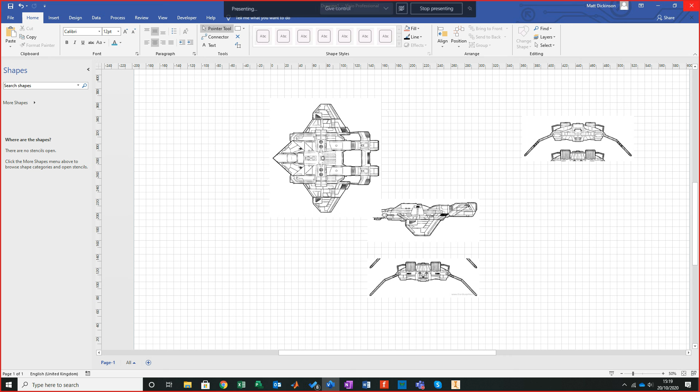I'm just going to close, well in fact I won't close, I'll minimize that, and now what I do is if I'm starting a new part.

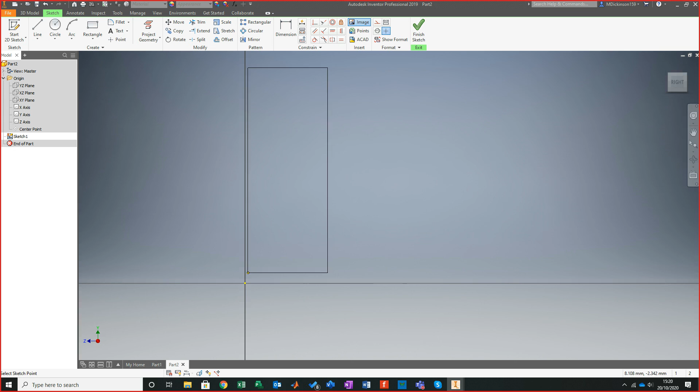I'm going to go from, which will be my right plane, so my YZ, I'm going to go sketch. Typically on SolidWorks it's inserts, tools, sketch tools, and picture. Here it is, image. So all I'll do is go to my desktop and go side image, click OK.

Now you can see there how it's been brought in. I'll bring it there. And you look and go, well, it's in the wrong orientation. You treat these as you treat any type of two-dimensional features you're operating on. So what I'm going to do is rotate it, set the rotation point. It normally has a real complaint if I set it here.

Yes, and I'm obviously just going to rotate it 90 degrees. Oh, minus 90. Then click apply.

And that is my first profile. Now I would never ever recommend anybody drawing straight onto it. So if I start sketching on here, the issue is...

You can get a bit annoyed with trying to turn stuff off and turn stuff on. I mean, this function here is great. I really like this, of where you can make the image visible, make it non-visible.

I would always recommend turning this into its own entity. So what I mean is if I just click OK, bring this back, and then just call this side image. I'd always recommend that. It allows you to just have a playground, if you will, of particular places where you can move things around and you don't have to worry with everything else.

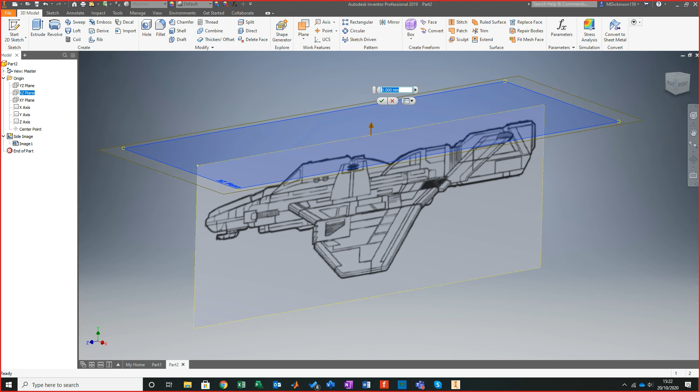Right, so now what I'll do is, there's a few things I can do. I can either go put in a new plane, so if I do an offset plane from there and then bring that down a little bit more, perhaps something like that, then click OK.

Now if I go sketch and sketch again, I'm just going to go image, top. Okay. Now as this comes in, you can see there, instantly in the wrong direction. This knows we want to be sitting on the datum down here.

So let's, first things first, rotate this round. So I click onto here, and I'm going to rotate it, pull it by this angle, and do it minus 90 degrees, which is good.

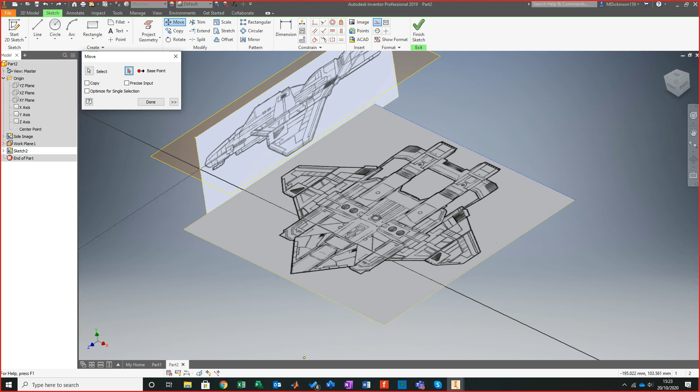Now we're in a position where we can choose how we want this to sit. Oops, didn't want that. I'm going to do it the proper way rather than messing around. So I'm going to click on the whole thing, click the point to move, and I'll click that. And then what I can do is just choose how that's going to be locked in. Something like this.

Really what I could do with doing is constraining that a little bit more. I've had students in the past spend weeks, and I know it sounds like I'm exaggerating, but they have spent weeks setting these up, and you should not really spend weeks doing these. This is just really just to give you a more comfort, a more of an overview as to where everything's going to be. You see there where I've got, it's not perfect, but it starts to give me an operational space. And again, I know this is just a nerdy spaceship, but what it does is it gives me key points.

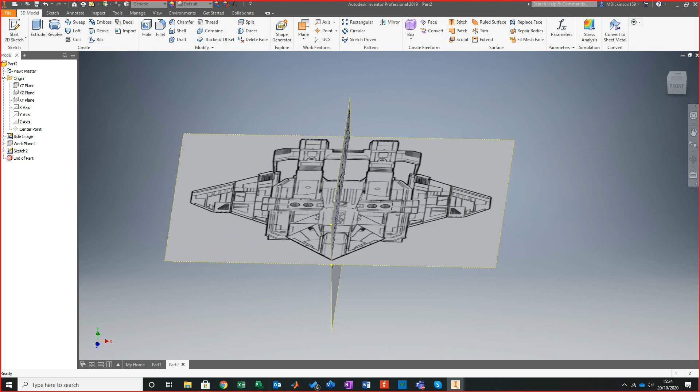So if you look here, look at this line to here. If I wanted to extract that line, this is where you guys need to really practice with this. So let's say I want this edge there.

If I just draw a line on there to there, and then I'm going to presume, based on how that looks and where that triangle is, that is the edge I was just referring to.

So again, I can go up to there and then go sketch. And then bring, whoops, that was awkward. Then bring that line from there to there and confirm that edge. And what we've got is them two.

So this is one of the reasons, by the way, why I like being able to just take that control. So I'm just going to rename that, by the way. So I'll call that top profile or top image.

And if I minimize that, visible on that, and if I want these two sketches for an interface, what I can do is... where is it now? I've just forgotten where the hell I've put these two.

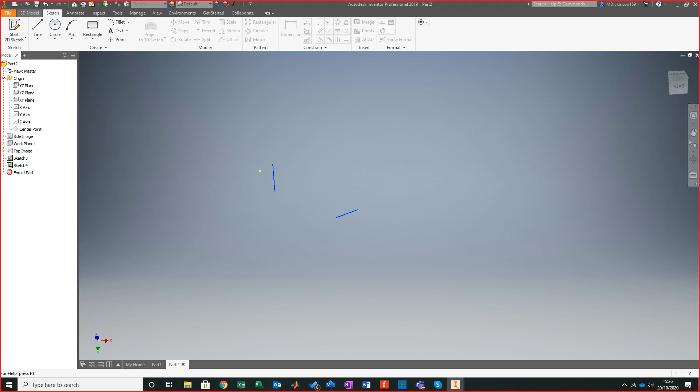There. So this is on. This is Inventor's way of being able to project the 2 points of the sketch.

In SolidWorks, it's a little bit different. It presents you with a guide curve, and it's only a guide curve. However, this I find really good because what it will do is it instantly projects you with a curve that you can operate with directly.

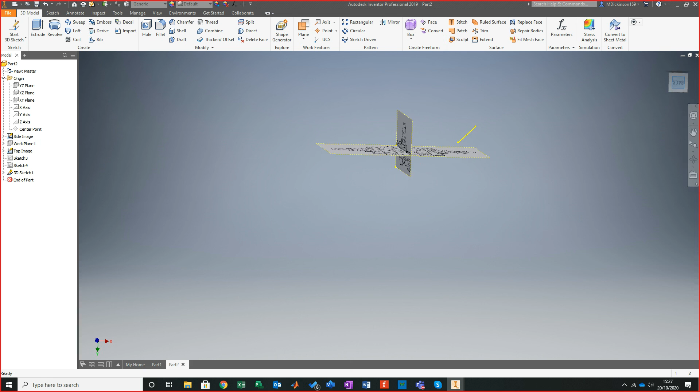So this is one that I could operate with directly. So if I come back, and now I've just used these two, so I'm going to hide these now because I'm happy with that. Now if I want to just check to see if it's something that's usable, so I'll go back, make that visible, and then make my top side image visible. So visible. And if I spin to the back, well, if I spin round, then let's take a look and let's go to the top.

Side. That's better. So if I go to the side, you see it's still meeting that edge of that line. If I go to the top, and I'm just going to have to make myself, I'll have to go to the bottom in this case.

You see that it still meets the edge of that line. So what I mean is, just by this as a sketch, it's given me an edge that I can start to work with. If I wanted now, I could easily pull this edge out and then move around to looking at that edge, and then what I've actually got is the tip of the wing itself. This methodology is one that students have done for years and years, and it's a technique that I personally use as well if I need to be able to generate things.

So when I've been asked before about how I generated the Iron Man armour, it's literally by doing this.

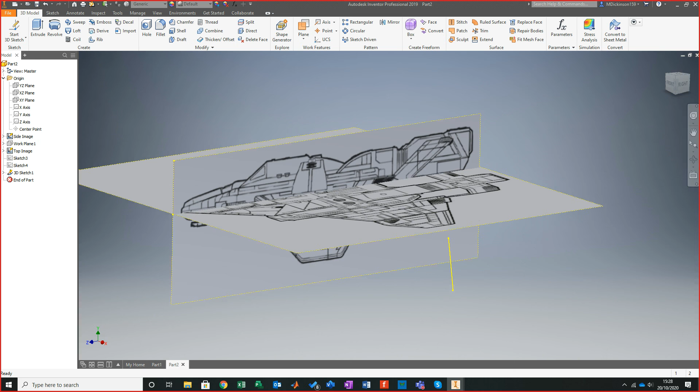So again, just as another demonstration of this, if I come from my XY plane and then I come out of my 3D sketch and go to sketch, all I do is again just add a line between there to there, and then just for argument, so let's put it there, because now we're getting cocky, you know. And what I'll do is put a fillet on there.

It was just ironic that it was 2. Believe me, Inventor's not that clever that it knew it was 2. So I'll click OK, and then what I'll do is spin it up.

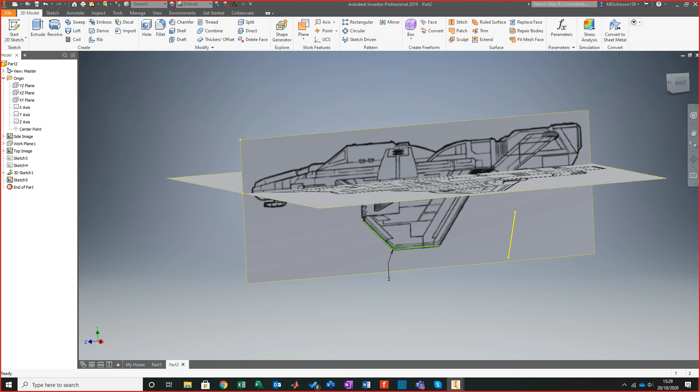Again, do the exact same thing. Sketch from the top. And what I'm after now is this edge here to that.

So what I'll do is do my line from there to there, and then over to, let's just take it right across there. Now, see there, I've gone a little bit too far, so I'll just bring that in a little bit like that.

Then I come back, and I'll come back again, get to there, turn both of these off, and then I'm going to project these again. So I'll go 3D sketch, and I'm going to do the intersection of you and you to give me you.

So I'll just hide these, because I'm sure at least one of you has been thinking, can I not just tap these together? The answer is yes, I can.

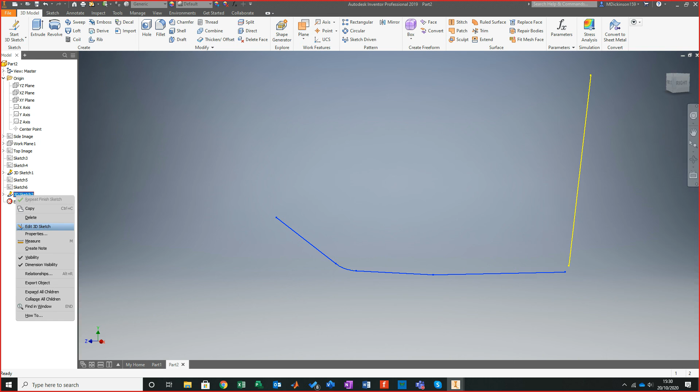So if I edit this 3D sketch, because it's now editable, if I do an arc between, oh in fact, let's do an interpolation spline between there and there, and then click OK, and then all I need to do here is wish it was working.

Oh, it's swine. Okay, let me just stick on an arc then. I was going to see if I could activate my handles, but it was just not playing ball. Stick it aligned.

So if you're doing any type of work which is like this, if you're doing anything that you need to start generating specific profiles like this, if you have imagery of anything, you can start to produce a perspective of how this thing will operate.

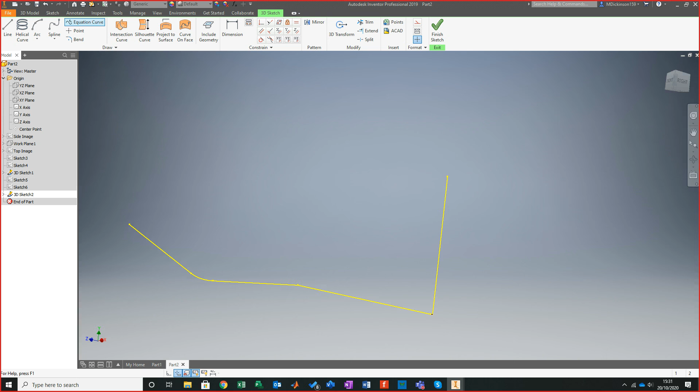So I mean, granted, all I'm doing now is closing the edges. If I finish on that sketch, now with that in mind, because I've now got this really bizarre profile, I can now start, I can actually at least put my first patch onto there to see how well it's going to function. So all I do with that is select all my edging,

And there I've got my first part of my wing. So if I bring the imagery back in, come from the edging, flip it round so I can see it from the other side.

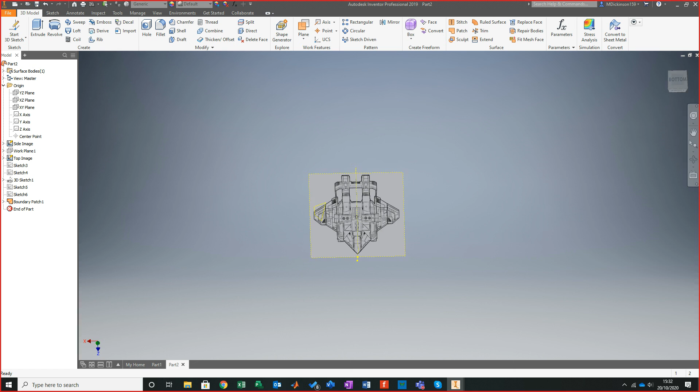Granted, what I think I've done there is not gone far enough up. I should have taken it a bit further than that. But when I look at the profile itself, I'm happy with it. Spin it over. I look at the profile itself, I'm very happy with it. It's one profile that I'd be happy with for now.

I'll probably delete that patch and continue to build the wing up that little bit more. And that is sketch images, and that's the profile with sketch images. And I know it is literally tracing a geometry, but you will find yourselves in a position where you can generate complex geometry super quick.